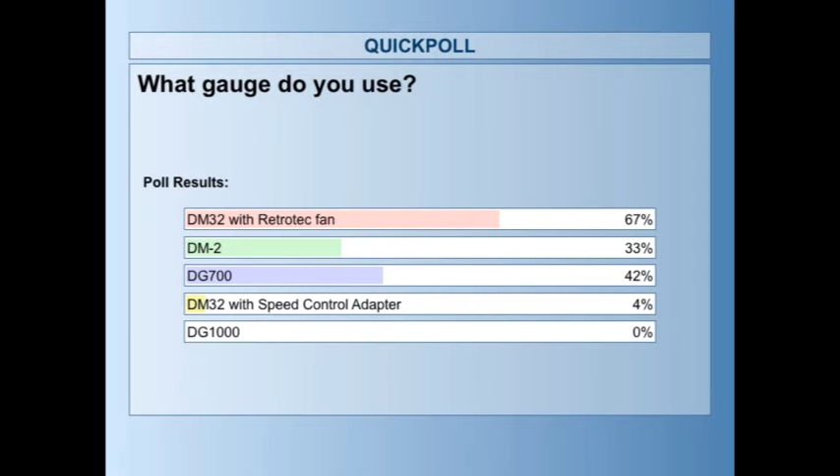If you are using the speed control adapter, which allows you to use energy conservatory fans, chime in with Jay in the background and let us know how that's working for you. We appreciate your participation. All right, let's do one more.

This doesn't pertain to blower door testing, but let's just call it testing. So how long have you been doing this? It gives us an idea about what our audience's skill level is for some of our listeners. Let's crank through this real quick and get it out of the way.

Everybody's chiming in, I appreciate that a lot. Clearly there's a bunch of folks who have a lot of experience here, so some of this stuff may be stuff you're very familiar with. I know a lot of folks tune in regularly to webinars even though they're already familiar with how to use this stuff.

So here's one thing that is out there, but it's changing. I have some things that go with it. You can trade in your DM2 or your DG700 and get a brand new DM32 smart gauge. But the exchange has changed.

If you have a DM2, make sure you note that your exchange program ends on December 15th. So you have until December 15th to trade in your DM2 for a phenomenal price to upgrade to the DM32 smart gauge.

For those of you who have a DG700 and are looking to move up to a much more advanced and sophisticated type of gauge that's user-friendly, they've actually altered that exchange to include Wi-Fi and the TC adapter. It's all one price.

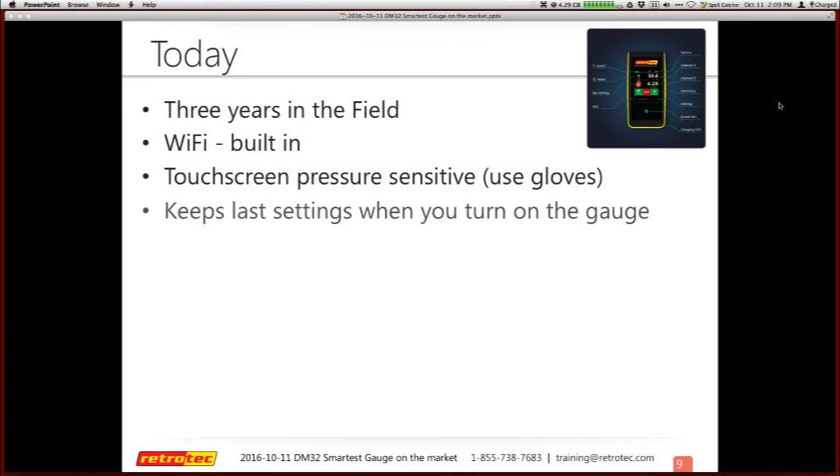So this is the DM32 smart gauge, the smartest gauge on the market. We appreciate your time, and let's dig into some details.

Today I have three slides that deal with what we're going to do today. Many people aren't aware that the DM32 has been in the field for 3 years, and it took probably 3 years just to develop. It was a painstaking challenge to come up with something new and innovative like this. Other people always want to follow and try to make stuff that's better, but you're always trying to compete with what's already out on the market.

This has been very well field tested, and thousands of these are actually out in the market right now. You can get Wi-Fi built in, but you don't have to. Other people refer to this as kind of a gimmick, but it's not, and here's why: you may need a second gauge and not need Wi-Fi—you're just going to use it for diagnostics around the house. You can actually save $300 on the price of a gauge by not getting Wi-Fi, so you can get a gauge for a whole lot less, and if you need it later you can always add it. We felt it was a better solution for those who want another gauge but may not need that feature.

Many of you understand there's a touch screen, but the one the DM32 has is pressure sensitive, so it's not like your phone. This means you can use gloves. If it's cold weather—we now have commercial duct testers, so a lot of those folks are out in exposed areas or wearing gloves—you can actually use the gauge with gloves on, without needing special gloves for the type of interface on the gauge.

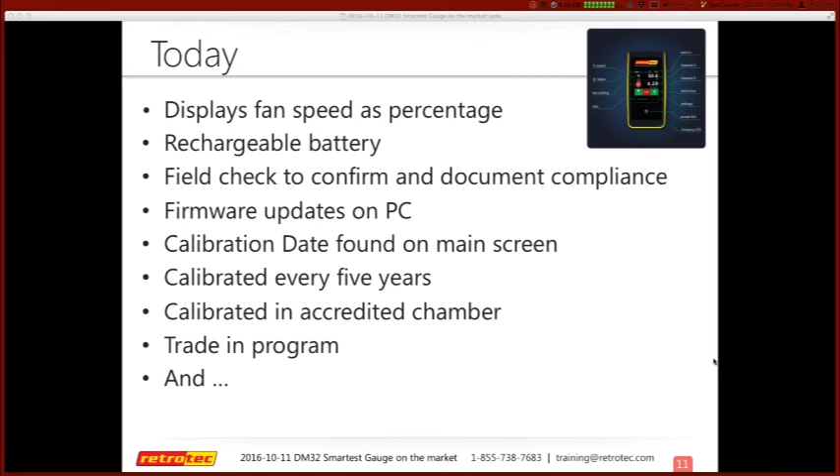So we'll hide that. The one thing that was appealing to me when I came to work with Retrotec stuff - in fact, I was a trainer, and I had both. I had 2 or 3 Retrotec systems, 2 or 3 Minneapolis systems. But the one thing I thought was the most exciting is seeing my results live in the gauge, especially air changes per hour. Georgia was doing code compliance before anybody, and I could go to a house and determine instantly if they were passing air changes per hour as I walked around and made sure everything was sealed up.

Okay, let's see what else we got here. This is kind of a historical perspective of what Colin Genge has been designing.

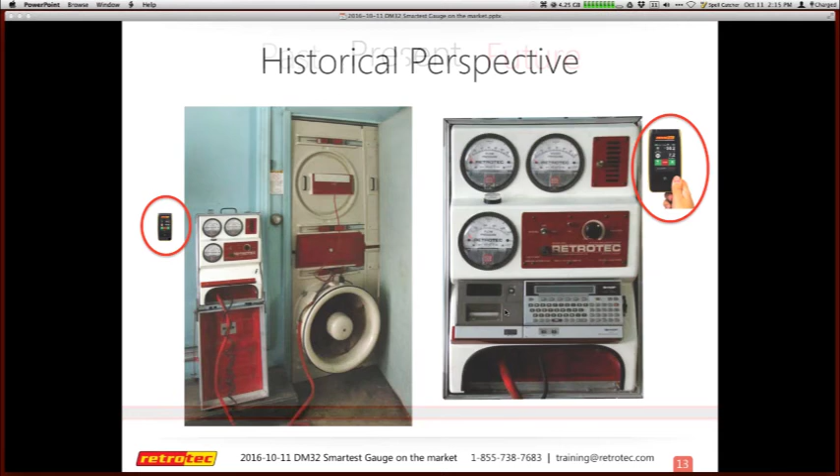You call them gauges, but these were actually, at the time, super high-tech, sophisticated measurement devices. You can see on the right here I have my 3 Magnehelic gauges, all controlled by various knobs to turn things on or off. Notice below here I have a little computer and a printer - these are like the same kind of printers you have for mobile card machines. So I could go to a job site, this is probably early 90s, do an automated test for the most part, enter my data, and have a printout right there on site.

And that was way beyond what anybody had dreamed of at the time. So Colin's goal was to reduce these into a smaller and smaller device. The historical perspective is that as things went along, they got more user-friendly and a little smaller, until finally around 2006 he ended up with a computer screen and keyboard all in one in the DM2, and then they jumped ahead to something more user-friendly, kind of like your phone - that's why it's called a smart gauge in 2013. It's an amazing progression. It no longer has a printer built in, but it does allow you to work with other apps that can give you instant results. Okay, I'm not sure why that was there, but we'll move past it.

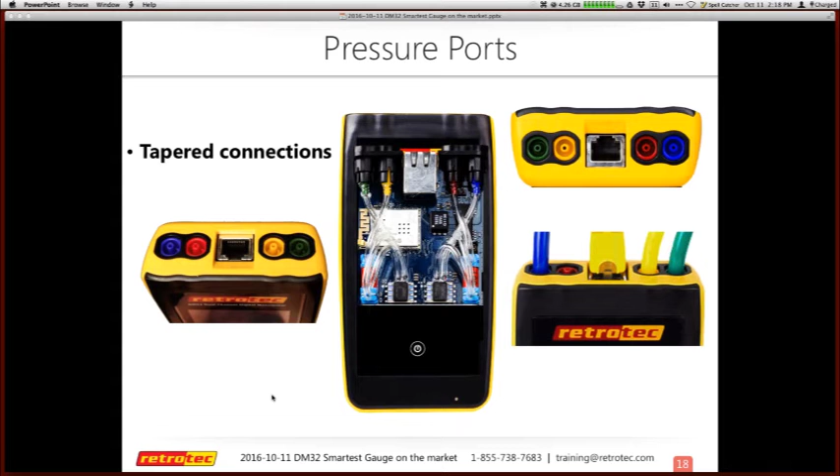You can see here that the tubing goes right around here, so it touches on the outside and on the inside, and it doesn't distort your tubing as you take it on or off. So those have been changed, they changed those probably about 5 years ago or something, and they're also on the fans, and it's definitely a much better air connection.

So here's our error-resistant process that goes along with the yellow fan, whether it's a duct tester or a blower door. They're all yellow, so that's always where the yellow tube goes, and of course the ports are color-coded, but the concept is everybody has a way of memorizing it. So for energy conservatory, maybe green to the grass. Here it's yellow tube always goes to the yellow fan.

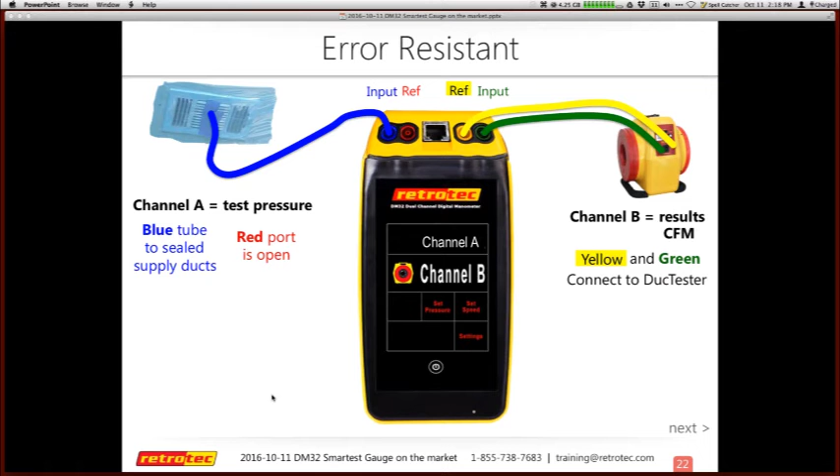That means if you're using an energy conservatory fan, you need to remember yellow goes to the fan, because their fans are yellow. So the difference is on channel B, Energy Conservatory uses the input of the top right channel to connect to its fans. And Retrotec does the opposite. They use the reference. I can explain later about why that is.

Same with the blower door. Again, yellow port goes to the yellow fan. Red always goes through the red cloth.

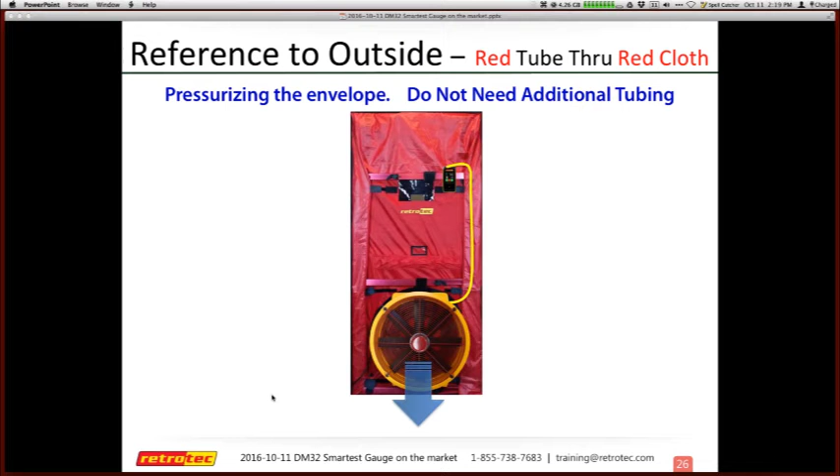One of the things that makes this gauge smarter than the average gauge is that if I'm going to do a pressurization test, meaning I'm on the inside of the house and I've turned my fan around and I'm now pressurizing, I do not need to add any additional tubing. This also could be the same concept if I was outside, pressurizing or even depressurizing. The gauge knows which way the fan is moving.

So I always connect my red tube. Red tube always goes through the red cloth. That's always the way to remember how to set this up. And here's what's happening here.

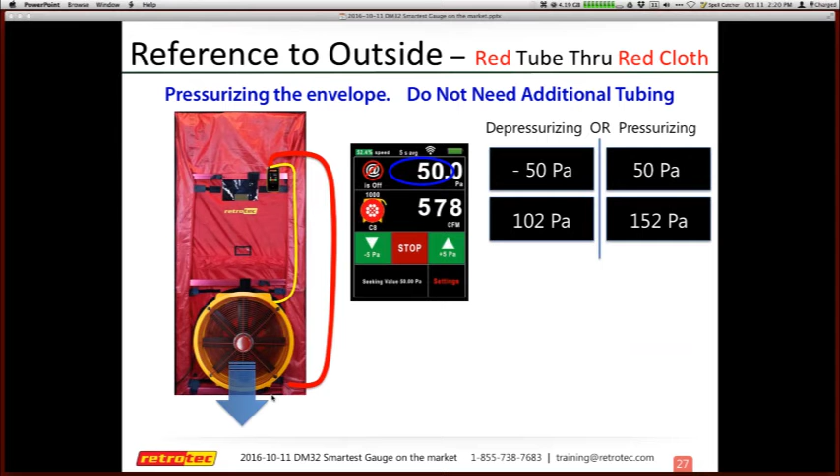When I depressurize, on channel B we usually get CFM results, but those are based upon a pressure, and you can actually change the settings on the gauge to read pressure. So if I was reading pressure, I would read minus 50 pascals on the top, and channel B would be reading 102 pascals. But if I was going to pressurize, what I would actually be getting is these results: now I'm at 50 pascals, not negative 50, and my pressure on the bottom, because I'm now adding more pressure to the inside of the house, would be reading 152 pascals.

This is why the DG700 requires you to add another tube to reference the outside, and that's actually how that gets set up. So this is what the gauge does.

It determines if the flow is toward or away from the gauge. So it's always determining if my flow is toward or away. When I'm pressurizing with the DM32, it will actually subtract channel A from channel B and give me my results. This is why this is considered a smart gauge.

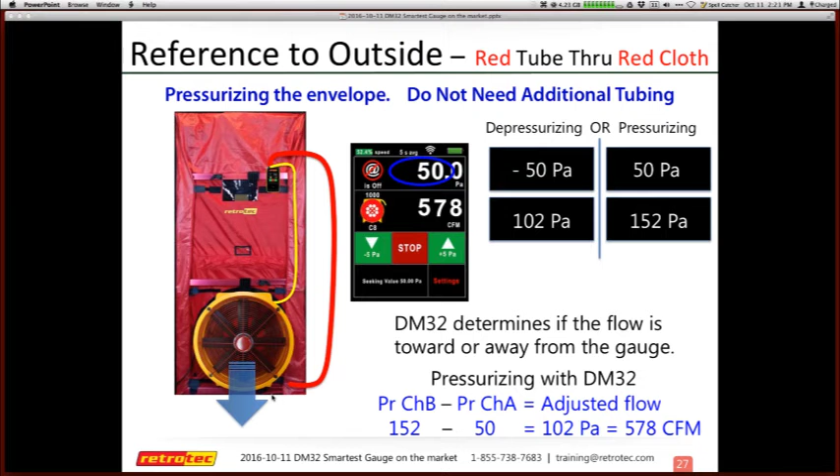Besides some of the other stuff, these are the things that are built into this gauge, and the DM2 has this same kind of feature. It's been inherent in the way that Retrotec has designed their gauges, again, to be more user-friendly, error-resistant, not knowing when do I add an extra tube or where and when. They actually just have to take care of that.

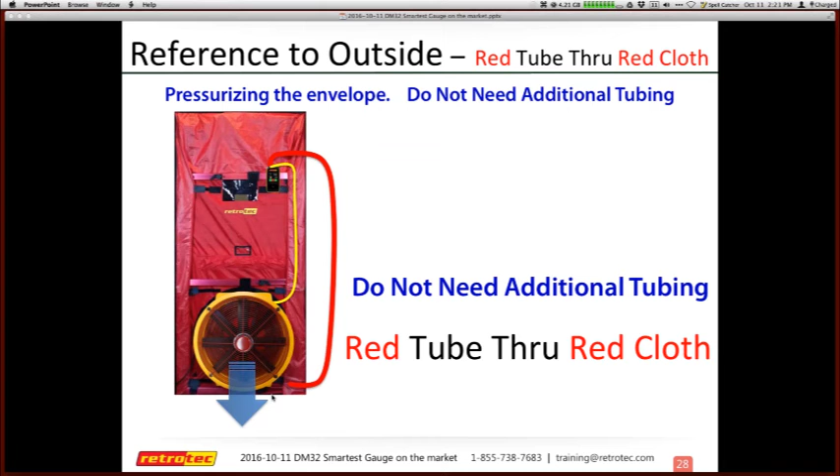So the only thing you need to keep track of is you do not need any additional tubing when you pressurize, or if you're outside. The red tube always goes through the red cloth. Think of it that it's not where you're standing, but where the gauge is located. So the gauge is on the inside, red tube goes through the red cloth. Gauge is on the outside for some reason you're doing a test like that - this is very common if you're doing multifamily. So I may be pressurizing or depressurizing. Again, red tube goes through the red cloth.

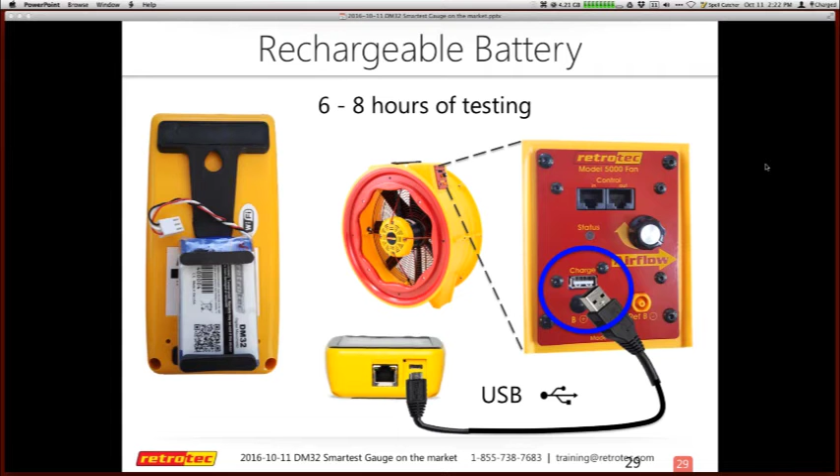Here's some of the things you can do. You can always plug the gauge in, even if you're driving from one job to the other. It's a basic USB port, so I can charge it anytime, anywhere, at home, on the road. But the new fans, the 5,000 and 6,000 fans, actually have a port on the side that allows you to charge your gauge if somebody left it dead for three weeks. You can plug it in and run it with the USB plugged in. You can use it as a power or charging port. I can actually run the gauge by just connecting it to the side of the fan. These are things that make the system user-friendly and make people more productive.

Some of the connections are on the bottom. The top is where I connect to the fan itself, but on the bottom I have an Ethernet port and a USB port. The USB can be used for charging or for connectivity. If I want to connect it to a computer, which I need to do for a firmware update, or connect it to software I need to run, I can do that off a USB connection or Ethernet. The difference is you're kind of limited to about 75 feet for USB, and that's pushing it.

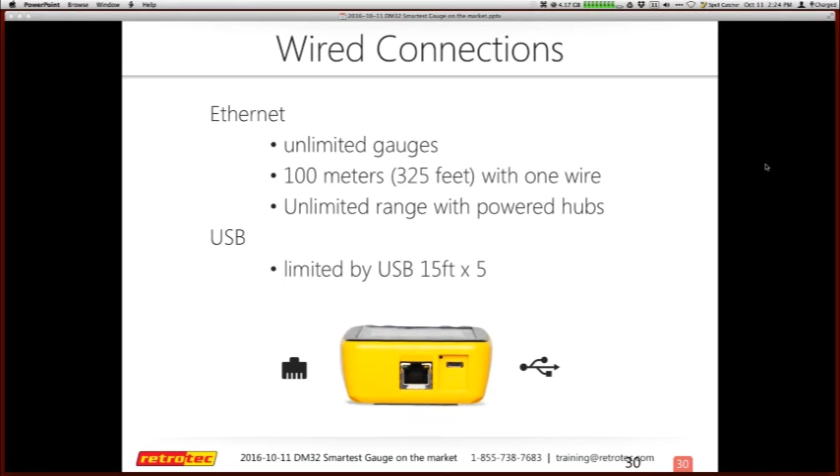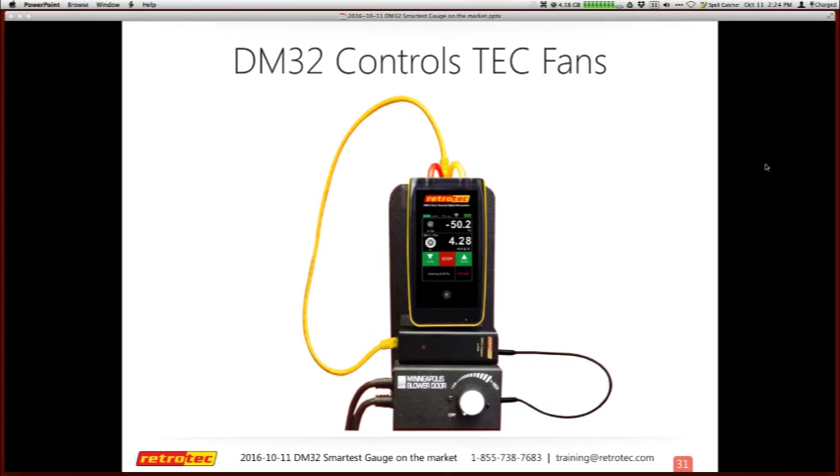Ethernet is really limitless because you can always add more power hubs to the line. I could have a gauge on the first floor and a fan on top of a 20-story building, and be able to control that and read what the gauge is doing through unlimited lengths of Ethernet. Commonly I'd have the fan and gauge on the 30th floor, my software connects at the bottom on the first floor, and I can automatically control the gauge through the different software Retrotec has to do automated testing, or just read the gauge directly with the virtual gauge.

As I mentioned, the DM32 does control TEC fans. What you see here on the bottom of the gauge is actually a speed control adapter. What it does is convert the signal from the Retrotec system with its fans into a different signal that works with the Energy Conservatory fans.

Most of the ways you use the Retrotec fans is with the cruise control concept. There's a knob on the side of the fan—the duct tester and blower door actually have speed control on the fan itself. So if for some reason I couldn't connect my gauge, like somebody stepped on the Ethernet and it died, I can still run the fan using the knob on the side and read the pressures through the gauge. That's normally how we do the Energy Conservatory stuff. But most people just hit set pressure and run the Retrotec stuff automatically, because it will go to your set pressure and do everything it can to maintain that, whether it needs to fluctuate up or down.

So this adapter allows me to use the cruise control built into the Retrotec system, very intuitive, with the Energy Conservatory blower door and duct blaster, as you can see on the side there. You can also use it for the exhaust fan flow meter and the true flow grid, but I don't need an adapter to do that—I can just use the gauge to work with the exhaust fan or true flow grid.

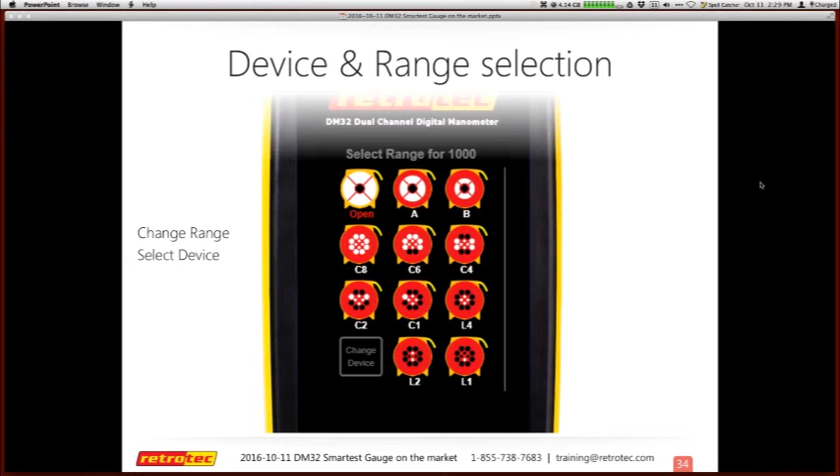So I can check the 1000, and you must instantly select a range. It doesn't allow you to get past this stage. So if I hit cancel, it'll just keep whatever I had set previously.

So if I'm going to set to the B range, now I'm ready to go with the blower door test on range B. And I can change my results by tapping on this.

I have other slides to show that. But sometimes you do a blower door with CFM per 100 square feet. California or other conditions may provide for this kind of requirement. So the results are not specific to the actual device, you can actually intertwine them as needed.

So navigating, the arrow takes you back to the home screen or the previous screen, and the three little dots navigate to the next page. So these are some of the different results that are on here.

So you can change your results, we've kind of mentioned some of those. Let's go through the scenario if I'm using a duct test. Normally I usually will start with CFM. I need to write down CFM in terms of my documentation, but I want to know the results at CFM per 100 square feet.

So I tap on channel B, and it opens up various results to be displayed. I can pick the CFM per 100 square feet, and this is where some people kind of get lost or confused. If I tap it again, it starts changing the units. So now I went from meters cubed to hours per meter squared.

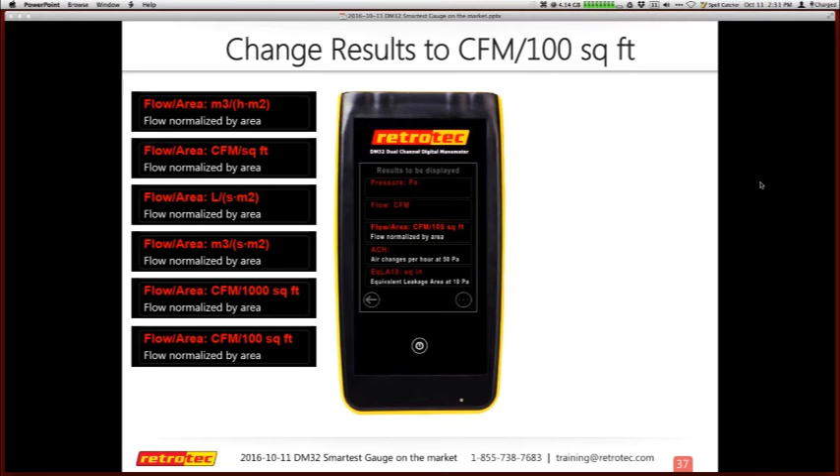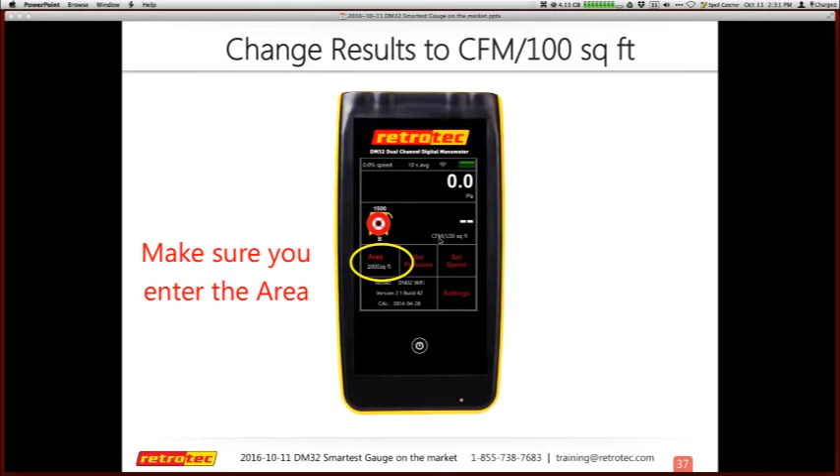There's a variety of different metric or US standards on here. Depending on which one you're after, you just keep toggling through, and you'll come back to the beginning. Be careful you don't pick 1000 versus 100. Whatever one is live on your screen is what you're going to get when you go back to the home spot. I can hit the arrow back, or press the home button briefly, and it takes me back home. Now I have CFM per 100 square feet on channel B.

This is based upon an area, as I mentioned earlier. So if I need to change my area, I can tap on the 1000 square feet. This also happens while I'm live, so I can go through the scenario of tapping on it, go through the settings, and change that. But if I'm running a test, I can actually see what is being displayed on the bottom. So if I need to change that — like, oh, I'm actually at 1,500 square feet — I can tap on the settings or the area, and it brings up a display on the right. I tap on the area, alter it, and it takes me back to the home page. Whatever square footage I need for the duct test or even a blower door test can be entered.

One of the options built into this is set pressure, which is very common — that's the cruise concept. The other one is set speed. Many users are familiar with set pressure because it's common. You set pressure 50 or 25, and it automatically knows if you're pressurizing or depressurizing based on how the tubing is set up. But the other option you also have is set speed.

What set speed does is actually very similar to the knob on the side of the fan. Instead of using the knob, I can now just use the gauge to set a percentage of the fan speed. So 100% is the fan doing full speed all the time, and 1% is barely on at all. The reason you may want to use your gauge to do this is that I can go up and down in 1% increments, versus trying to do the knob up and down, which is more time-consuming and more challenging to tweak your actual control of the fan.

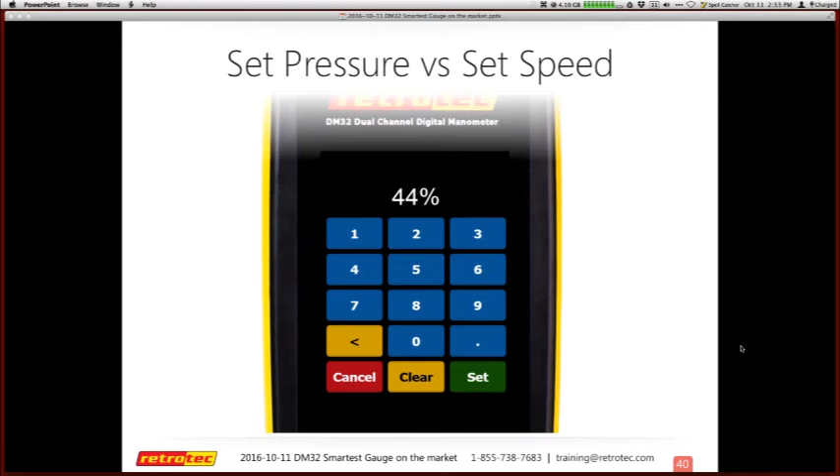So I hit set speed, and it brings up a display. I enter the percentage. One way to know my best percentage is I would normally do set pressure 50, and then watch what my speed was in the upper left of the gauge. So if I knew it was 44% to have gotten to that stage, then I can actually do this.

The difference between why you may want to use set speed over set pressure is if you're doing air sealing that's live in the house and you want to keep a pressure going. We know you don't need 50 pascals to do air sealing, but one thing you may want to do is go around the house while people are opening and closing doors, or you're opening and closing things to seal them off, maybe to get in and out of the attic.

So what happens when I'm on set speed is that when the pressure changes in the house, it doesn't try to ramp up to accommodate that change. When the doors open, it doesn't say 'I have a whole other hole here, I've got to ramp up my pressure.' And when the door closes, it doesn't say 'oh, I don't have as much resistance' and create a major pressure spike on the fan, which can sometimes cause the fan to fall right out of the door. So set speed does not alter conditions when you're opening or closing doors in the house. Clearly your results will change, but it doesn't cause the fan to ramp up or down — it stays at a consistent speed.

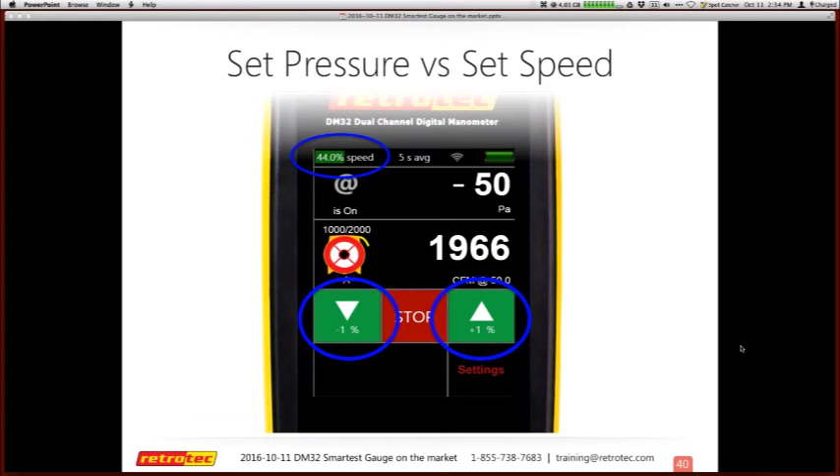So here I can ramp up and ramp down by 1%, which is a lot easier than using the speed control on the fan itself.

One of the other features that's very valuable, which I can't really display in the fan here in the slides, but I can explain it. You tap on channel A, and it will hold your readings in channel A and channel B. While it's on hold, you usually see a flashing hold indicator at the top, then I can go down and change my settings. If I want to see what the CFM is, I can do that, and change any of the units or results, all while this number is being held in the gauge. I can even turn the fan off right now, knowing that whatever is in the gauge on top is being held while I make adjustments on the bottom and write down my results.

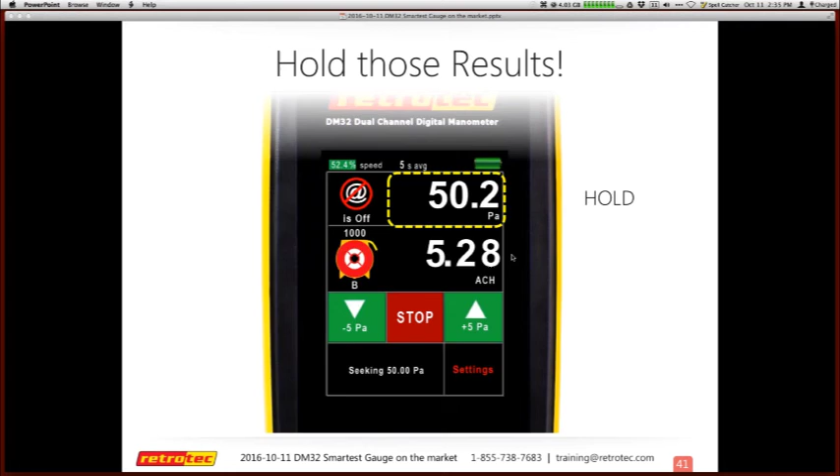If I needed CFM, I could do that, and if I needed air changes per hour or CFM per 100 square feet, I can obviously do that. Then once I release hold, everything goes back to the newest readings.

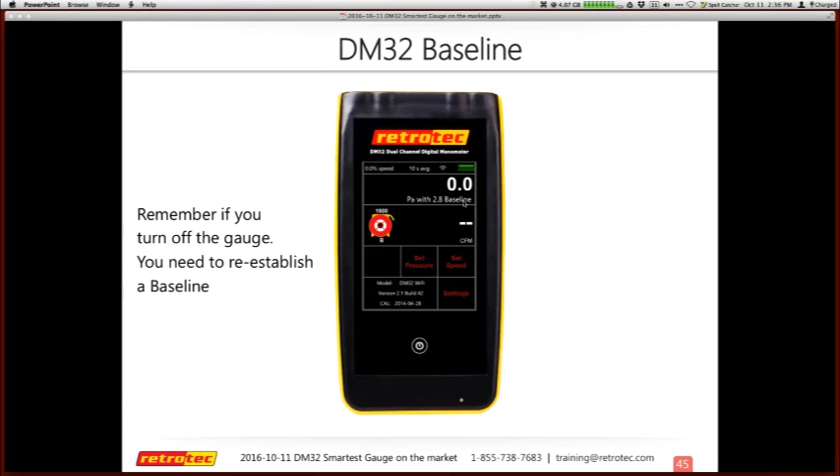So of course it does baseline, but you can also do various things with the baseline. One of which is I can basically hit start, stop. I can also do a variety of stuff with time averaging. All these things are built in, but I can see on the display what my baseline is, and know that I have one, or if there's no display here, that I do not have a baseline. That's one of the reasons why I feel these are powerful tools to let me know whether or not I have it and when I need to eliminate it.

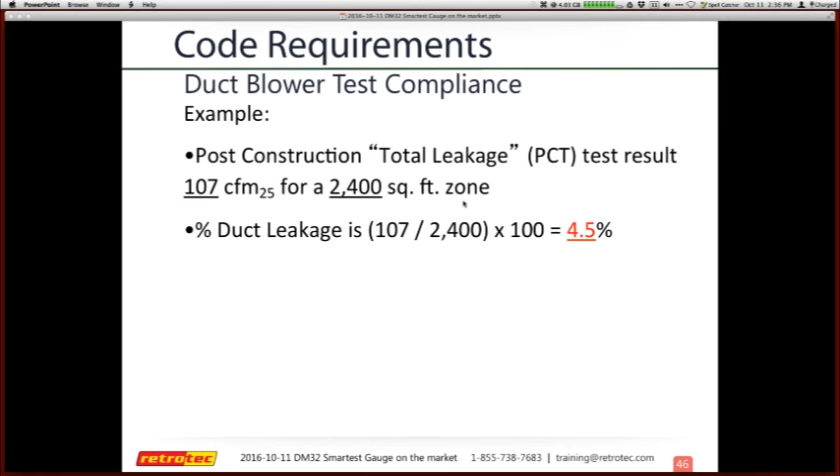This is one of the things that drew me to Retrotec, is that I could get my results live during my test. So if I'm going to do a duct leakage...

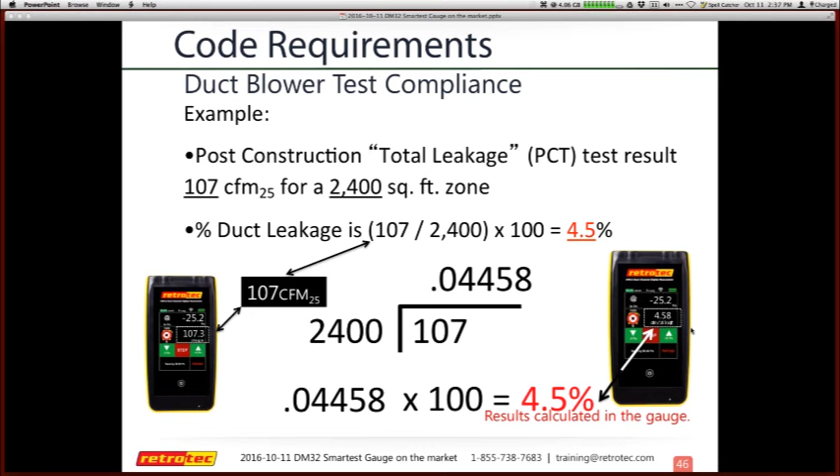I clearly have blower door and duct leakage combined here, so I must have combined my slides by accident. We're just going to call this a duct test, even though it says blower door compliance test. At the top here, on the side, I normally get my results that say 107 CFM, and I divide that by the square footage that this duct system serves, and I can get my percentage live. So I can get 4.58 CFM per 100 square feet live in the gauge as I'm doing it.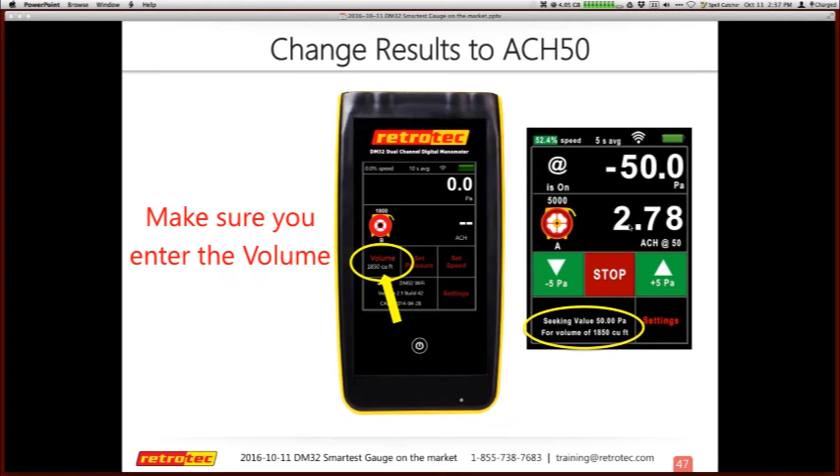I can also do the same with air changes per hour. Air changes per hour will also give me a volume that I can alter, and if I'm doing the test, I can see at the bottom what I'm actually testing and what my results are, giving me this 2.78 air changes per hour.

Of course, it has an @ feature. We're all familiar with this concept of turning the gauge on and off. I struggled for a while understanding what the heck was the @ feature and what it did. So on the left, I'm only at 45 pascals, and my @ feature is off, and these are my results, 2798. When you turn on the @ feature, it will extrapolate what your test pressure is. Notice I'm still at 45 pascals, but it will give me my results as though I'm at 50.

So this is really valuable. In fact, I just turn it on as a habit, because sometimes, especially for a blower door, my results go from 47 to 52, and they can fluctuate depending on the house or structure, or conditions from outside. To avoid that, the @ feature will help compensate and give you your results at your test pressure.

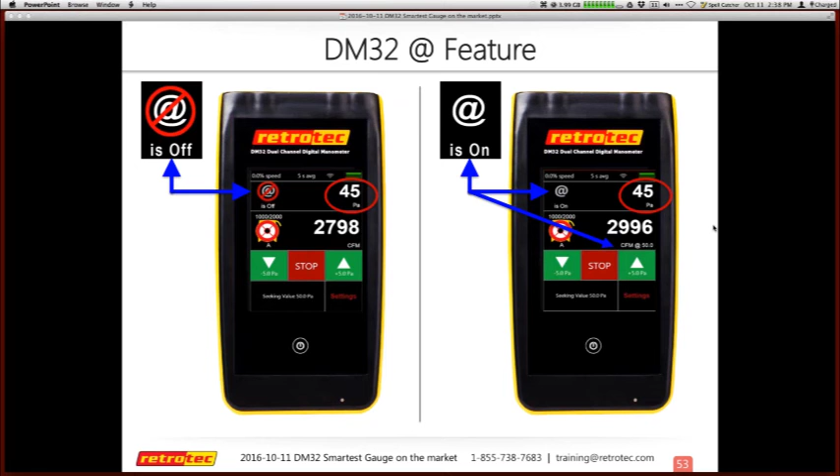As I mentioned earlier, this is actually a time saver, but it's also error prone, in that every time I turn on the gauge, it will keep my last settings. So if I did a blower door test in the previous house, I go to the next house, and boom, the exact same blower door configuration shows up.

Things you want to make sure you keep track of is whether your range has changed, or if you are going to use any kind of extrapolation like air changes per hour or CFM per 100 square feet, I need to change the volume or the area that goes along with it.

So basically I can confirm my settings. I usually try and tell people, if you're used to the gauge or sharing the gauge, something may have been tapped as you shut it down. Just make sure you're on pascals on channel A, CFM is your result you're looking for, and your device and range are all set up. If so, then you're good to go. It's a matter of just hitting set pressure, entering the pressure you want to go to.

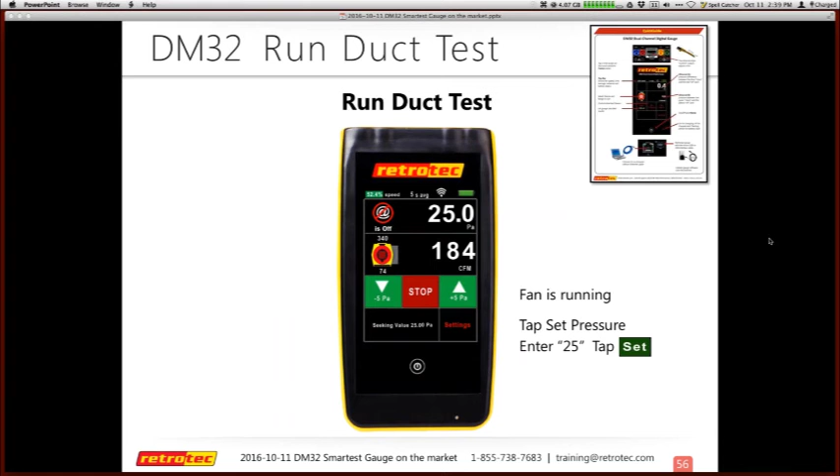So we're really going to do a duct test here. Some people may do a blower door, starting at 25, but based on my device, I know instantly I have a duct tester, and I'm probably going to do a duct test. Again, you can use a duct tester for a blower door, especially for passive house or other smaller units. I can get my results instantly with the @ feature at CFM right there. It only takes a matter of seconds to turn it on and move through the fan to get your results.

Notice that I can actually increase or decrease my pressure also through the gauge with the arrows that go up and down. So if you wanted to start at 25 for blower door and then jog your way up by increments of 5, I can now increase the pressure that it's achieving, or I can just hit stop and reset for 50.

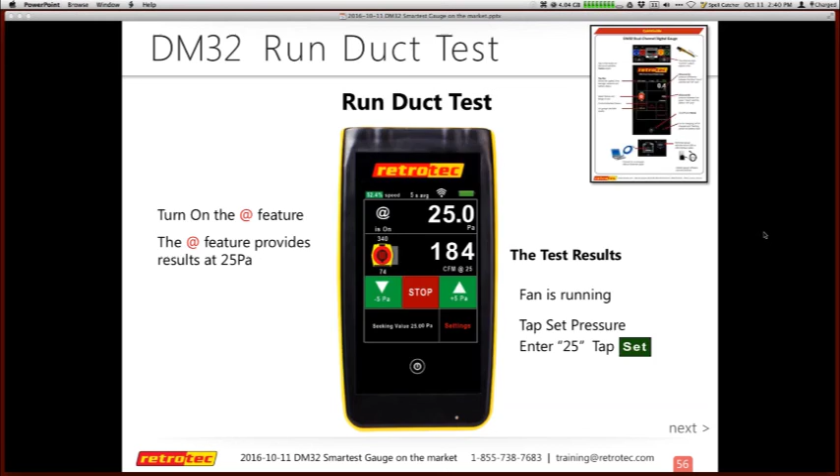One of the other things it also has is multiple languages. I have Spanish, Dutch, French built into the gauge. There's also German and Portuguese, I believe, and a variety of other ones that can be requested when you get the gauge. So when things are shipped overseas, they clearly will put in German for the ones that go over there. If you're looking for a different language that's built in, you can reach out to Retrotec, and they can either help you with the firmware, or if you're going to buy one that needs a different language than these, you can have it set up there.

Okay, so I thought I would explain the time average, because time average is quite different between a Retrotec gauge and the Energy Conservatory gauges. What happens with Retrotec is that it's a running time average, which means it's always capturing the last amount of time - here I have 30 seconds. I gave it a long time average to explain why this is something you want to make sure you account for: wait at least once for that same amount of time before you gather your results, but we recommend really twice. Most people probably use a 10-second average and it goes really quick, but the example works better with a 30-second average.

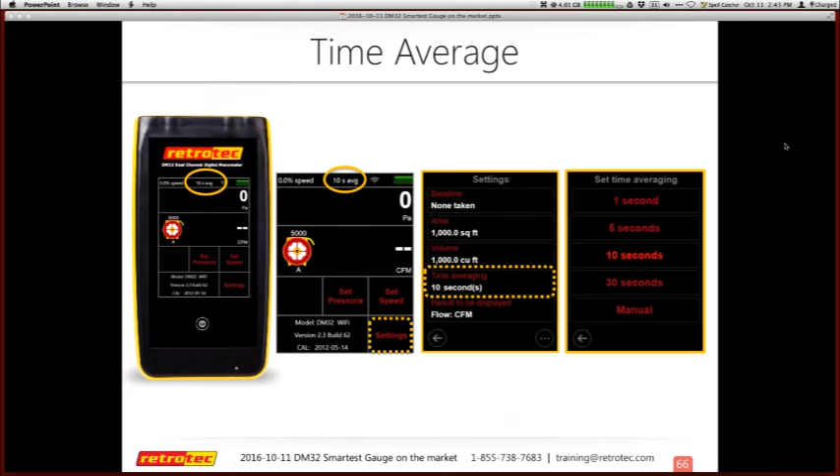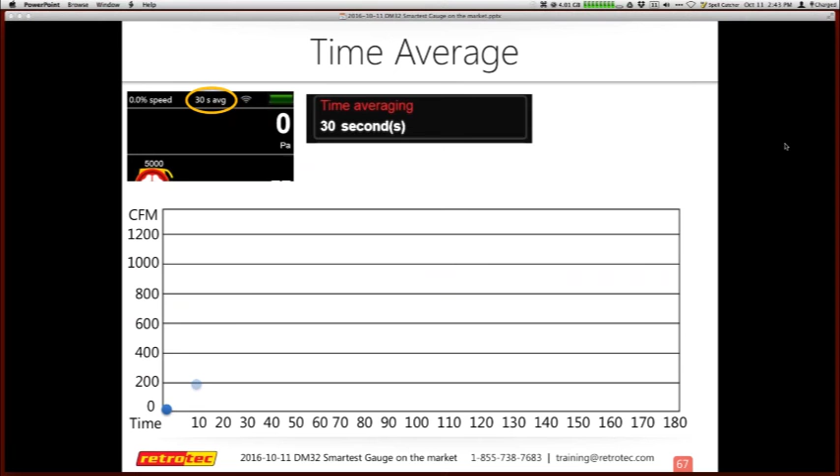So now let's go back and you can kind of see this as it goes through as a live scenario. So I'm doing my test, and these are my test results as they go across. This kind of looks like the rCloud app, actually. So for those of you looking at that, you can see what this kind of looks like live, and I can actually watch my time averages as it goes across.

Normally we would be reading our results while it was still on. So somewhere in here I'm reading my results, but I definitely want to make sure I'm in this range between the two sections here, and then we stop the fan. So you can watch your device. If you're on 30 seconds, it takes a while for it to actually get back to 0, because it keeps averaging these 30-second intervals until it finally gets down to 0.

So the other difference is this: the Energy Conservatory captures 30 seconds, 30 seconds, 30 seconds, whereas this is more of a running average. It's gathering the last 30 seconds. So even though you set it for a 30-second time average, it's constantly changing on you, because it gives you the last 30 seconds as it goes.

goes. Oh, this is supposed to be dropped. We already did this. Sorry. So it also will

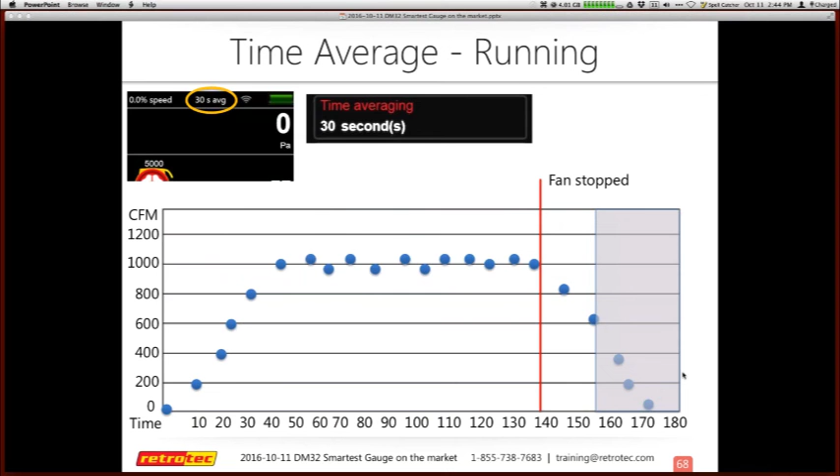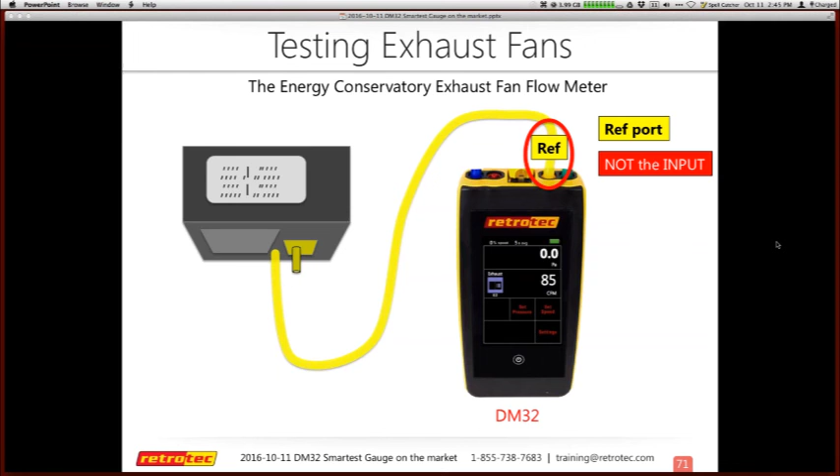One of the coolest features built into this gauge can help when you have an exhaust fan that's too large for the exhaust fan flow meter, or you're doing some kind of range hood where clearly there's no way to actually measure this. You can use a flow hood, but sometimes it won't actually fit below the range hood, even if it's out in the middle of an island. So what you can do is built into the gauge, and it shows up as a device.

So after duct testers, the blower door, TC equipment, on the last page is this hole flow — it's kind of a device built into the gauge that allows me to create my own flow device. So what I can do is get a cardboard box.

You're really looking for something with some decent depth — 6, 8, 10 inches is a lot better. You're going to cut an opening across the bottom. The image I have probably should have a little larger opening; I'd recommend something between 3 to 5 inches. You can always make it larger, maybe 4 to 6 inches. Somewhere in that range gives you good flow through the device.

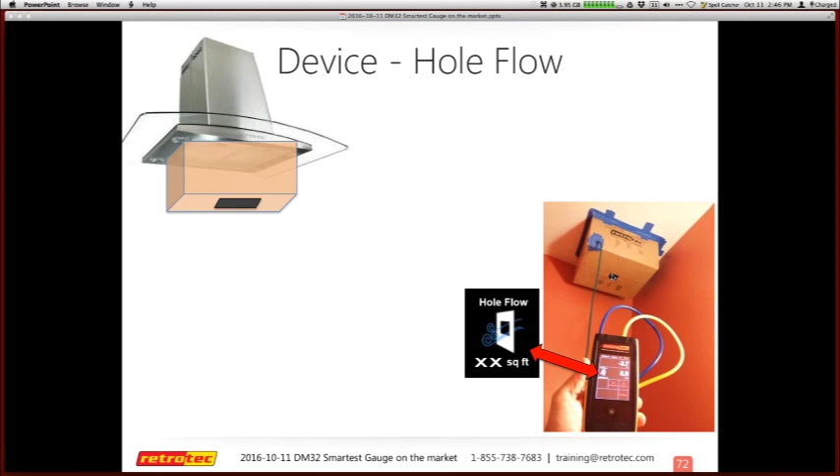Then I'm going to connect my gauge, and here you can see I connected channel A in the blue and channel B in the yellow. This allows me to monitor the pressure that runs through and also get my results at the same time. So you can use this for exhaust fans — you cannot use it for supply.

What's inside the end of this blue tube is actually a static pressure port, or sometimes I'll run the tubing around the 4 corners of the box with little T's on the side, so I can get an average of the pressure inside, or make sure my static pressure probe is not in the flow. Wherever I'm reading at the end here on the box cannot be affected by the turbulence that moves through the box itself. So it definitely needs to be off to the side — all 4 corners is a great way to do it, or at least have a static pressure probe that isn't affected by the flow.

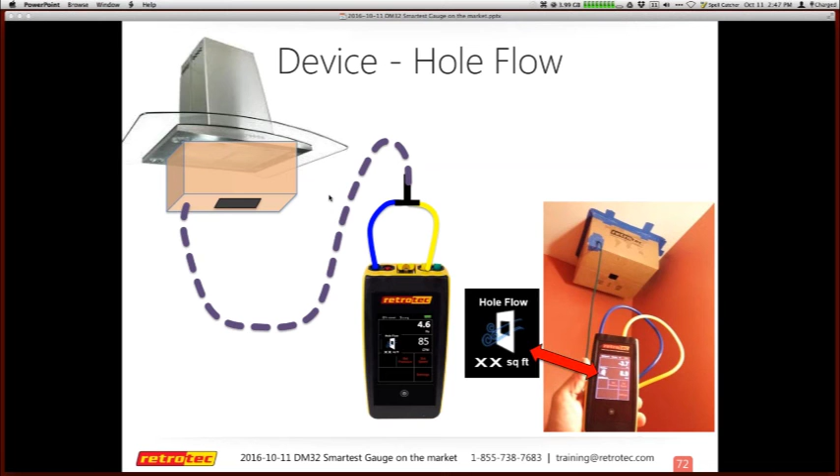So any questions about what we talked about? Some of this may be familiar because you own the gauge, but you may not realize all the stuff that it does and just how sophisticated this little device is. So if there's something that you are wanting to know if it does or doesn't do, don't hesitate to ask.

So one of the things is this is an app, and there's several things that apps do to make the gauge better and smarter. I highly encourage you to check out rCloud. You can go to the Retrotec homepage and see rCloud right there, click on that, because I feel this is going to be one of the greatest things that will make our lives better.

Because what it allows you to do is open up your phone or a tablet, since all of those have the ability to do Wi-Fi, and connect directly to your gauge and run the test you're looking to do automatically. No matter where you're at, if you have a device like a phone, it will always geolocate your location. So if I have Wi-Fi, no matter what, I can always run my test automatically. I don't need anything else to do this. Use rCloud - that's why it's such a basic and amazing app.

And I can document that this test was done exactly as the standard was for that test, whether it's RESNET, California Title 24, or ICC code. These are all built into rCloud to perform these types of tests automatically.

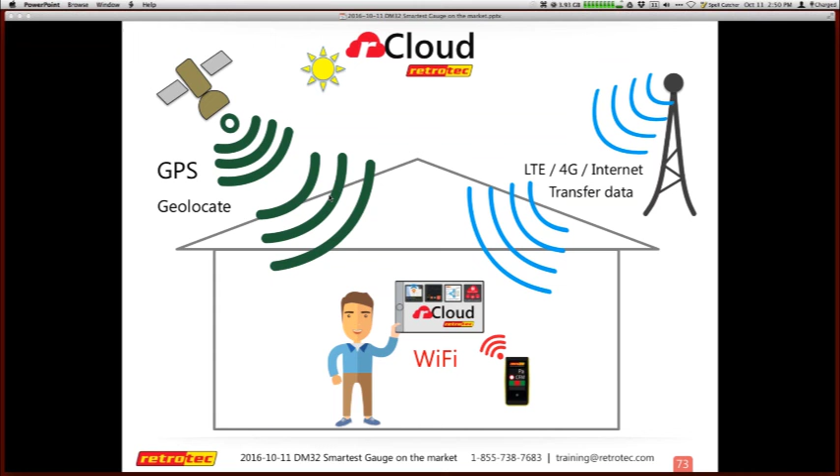But if you do not have internet, I can still use GPS to locate where I did my test. It'll provide a lat-long, a latitude position, that I can put on a map and say here's where I was when I did my test. So if I do not have LTE or internet connection, I can still determine where I was if my device had that type of connection. But even if I didn't have that, I can always do the test.

If I do have the LTE, when I'm done with my test, I can upload this data and share it with anybody instantly. So there's a lot of great features, and the reality is most people will be able to pull out their phone and do a test automatically, geolocate where I stood, time, date stamp, perform the test per standards, and share it with my building official, my provider, anybody before I left.

So we really think this is going to be more of a requirement in the future, that you did verify you did your test, where and how, and that it was done with an automated scenario. The Europeans are already all over this. They think doing a manual test is a poor way of applying the technology that's out there, so they really promote and in some areas almost require the test be done automatically. They know there's less user error, people aren't writing down numbers by accident that are incorrect, and everything is done with software that tracks it all.

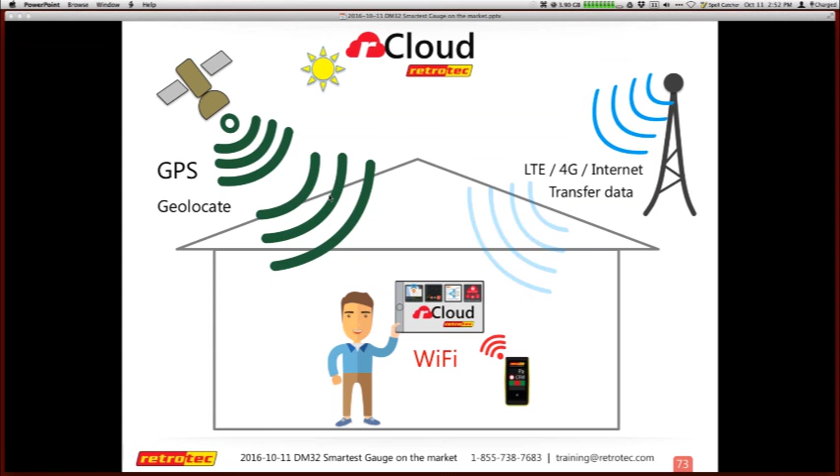So the Apple version is coming out, we're hoping in about a month. We do have Android available now, and you can also go to the Windows Store and download the Windows version. For Android users, please let us know what kind of success you're having with this. It's kind of an early release, and there are so many Android phones out there that do different things, so we're looking for feedback on what kind of phone you have and whether you're able to successfully use rCloud.

The only thing you need is your gauge to be Wi-Fi enabled. If you need help with those connections, you can watch the webinar or contact technical support to make sure you can get the gauge and your device connected.

It's as simple as connecting, picking the type of test you want to do and a standard, and you're able to follow the prompts, connect the gauge, and run everything automatically.

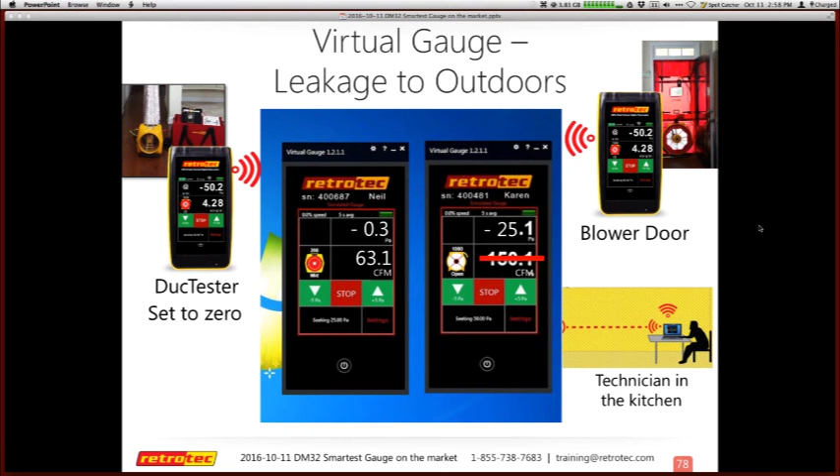So this is a really fun app to do things like that. In the future rCloud can actually do this, but that's probably more than a year away—that's where we're headed.

One of the great things about Virtual Gauge is that it's free and works on any PC, and you can also simulate tests, the test environment, so you can set it to pretend it's connected to some sort of fan. This is a fantastic tool for teaching or for learning—teaching other people, or learning it yourself. You don't have to buy anything, you don't have to spend any money. In fact, when Joe first contacted me and said, 'Hey, we're going to bring you on to Retrotec,' I didn't have a gauge, and I used the Virtual Gauge to learn how to use it. So it's a really useful tool for a lot of different situations, not just for training on a live work site.

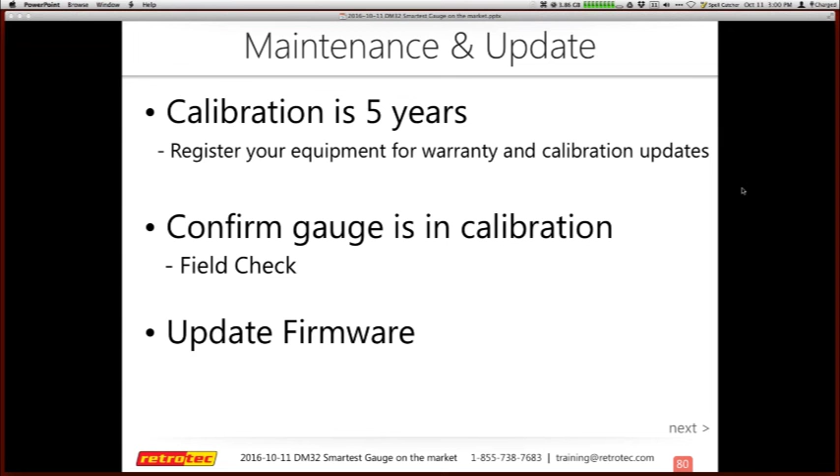So I'll run through the last scenario, which is pretty quick, just some maintenance stuff. Calibration is every 5 years for the gauge. We do have a field check confirmation. There is firmware to update, so there are things you need to do to your gauge, as with other devices that we own. Digital sensors every 5 years—very helpful.

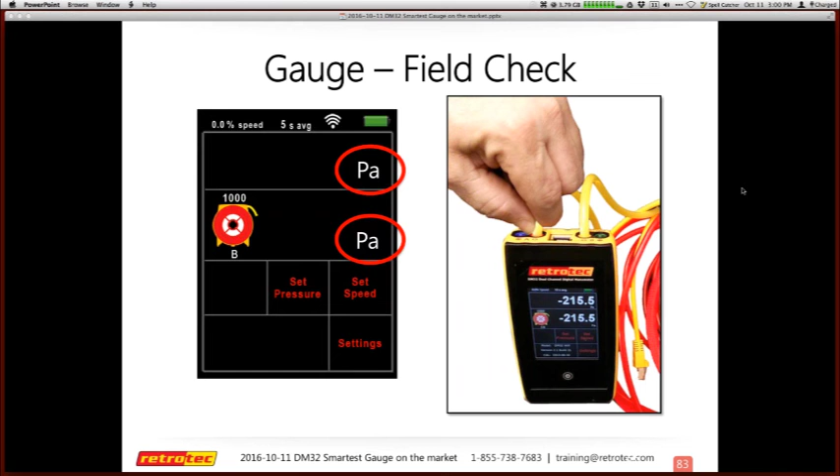We do have a couple of webinars that cover this, but if you caught this earlier—if you want to do a field check, in fact I recommend you do a field check every time you use your gauge, because it's so simple to do. You just want to take your gauge and make sure it's set to Pascal on Pascal. You can do that by tapping channel B and hitting Pascal at the top. When you come back to home, they'll both be on PA, Pascal, Pascal.

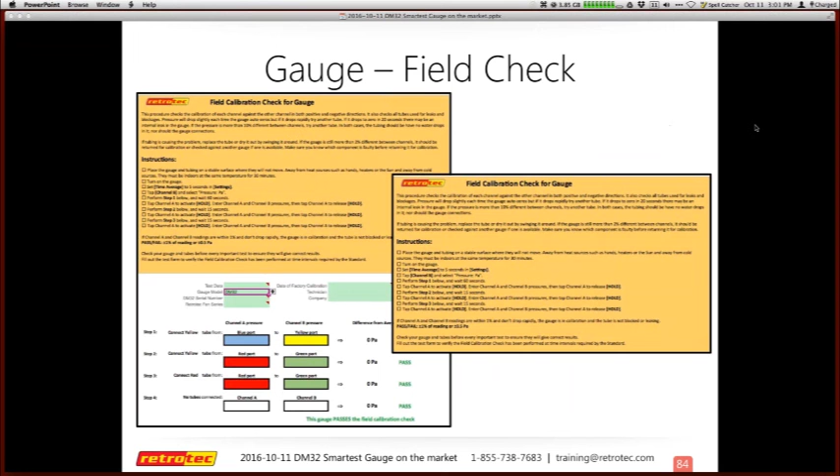And just use your yellow tube that comes with it to do that. Rich created a field check document. If you need to document your stuff for RESNET or just in general, you can download this on their website and fill in the information. And they fix the color coding, but it actually tells you what port to connect to what.

And you enter the results, and it will tell you if you pass or not. And the reason that we recommend you use the tube is because the results are using something that is a standard length to confirm that your results should be in the same range, so you know that. So if you use a really short tube, you're going to get numbers that will always pass. If you use a really long tube, it's actually hard to pass because the pressure difference is so little based upon the length of tubing.

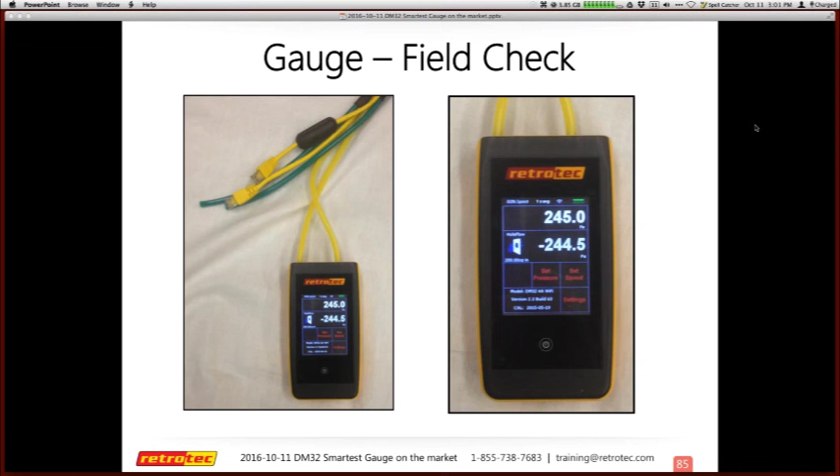So most of the yellow tubes are around 6 feet long. They always come with your system, and that's a great way to determine if your unit is working correctly. So it looks something like that.

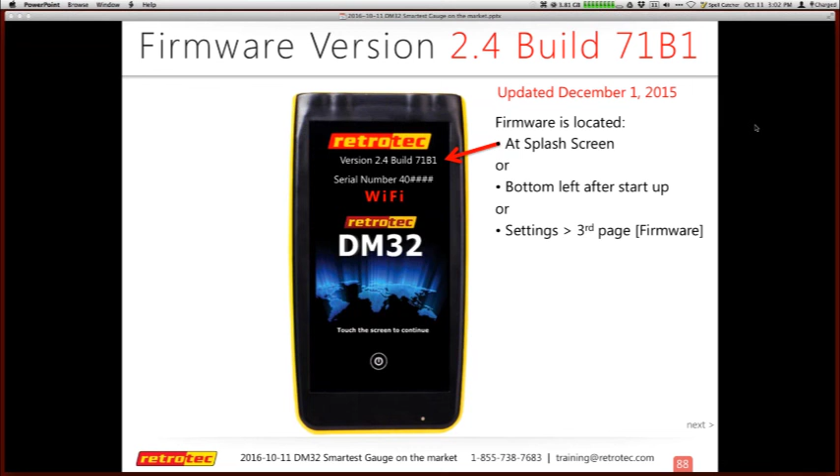So for firmware updates, most of the people that call and say 'I have a problem with this' or 'this is not working', usually the first thing we ask is, what is your firmware? And they're like, 2.2 something something, and they realize that they need to update their firmware. So we highly recommend that you do this regularly, and it's done automatically when you open up the configurator on your PC, it can check and tell you if you need to do that.

So on the splash screen in the beginning it tells you what your firmware is. That only lasts a couple of seconds, so then the next stage is your home screen will tell you what your version is. Or you can go to the third page, and under your settings it will tell you what your version is. So it's easily found in your gauge.

You can download the configurator, which is free. It has all of the things that connect your PC and the gauge together. And one of the best ways to do it is open up the configurator, have your gauge off, plug in the USB, and it usually automatically turns on your gauge.

If not, turn your gauge on, and it's usually found 9 times out of 10. There's always an issue with drivers, so if that didn't work, close the configurator, unplug your gauge, and do it again by opening configurator first, and then connect your gauge. Worst case, restart your computer and try it one more time. It's rare that it doesn't connect after a restart. And again, it isn't really the gauge, it has to do with PC drivers and some of those challenges that you might have.

So as it gets older, it gets smarter, like all of us, and it goes through a whole scenario. When you plug in the gauge, it says yes, you need to update, follow the prompts. It's very straightforward, and you can download this from Retrotec on their software page.

You also can update your Wi-Fi, which is kind of fuzzy here. If you need to do network settings, you can do that through the configurator. You also could do any other settings if you would decide to. On tech support, this is the thing you're going to do and follow their requirements.